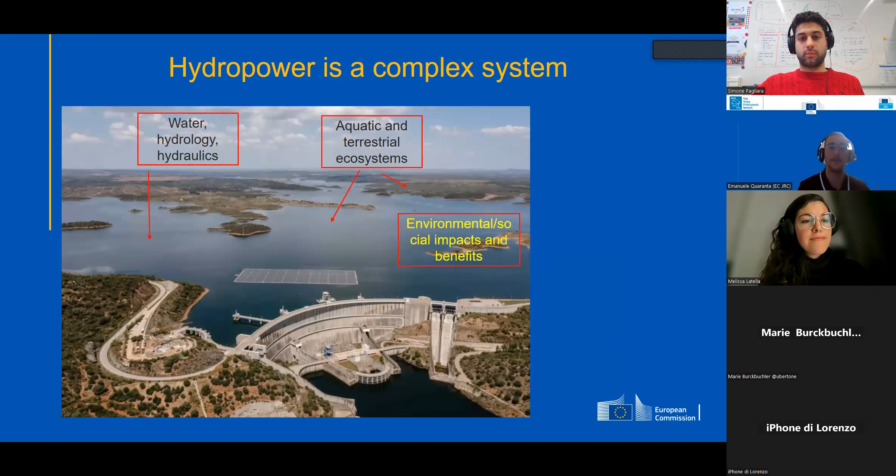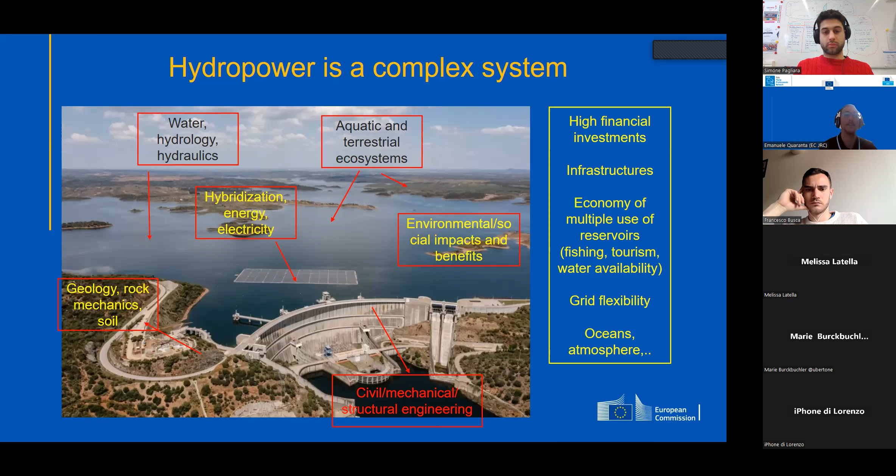Hydropower is a complex system because when we talk about hydropower, we talk about water, hydrology, hydraulics, but also about aquatic and terrestrial ecosystems. We talk about impacts and benefits on the environment and on society, on geology, rock mechanics, but also civil, mechanical, and structural engineering. We also need to consider energy, electricity, and the hybridization of hydropower with other energy sources. But there are a plethora of other sectors involved, for example finance, infrastructure, multiple purpose reservoirs, grid flexibility, or the interference of hydropower with the ocean and atmosphere. So you can understand that when we talk about hydropower, we talk about a lot of different sectors.

Just a bit of terminology that I will use today, since maybe not all of you are familiar with the hydropower sector. Today I will also talk about pumped hydropower storage. Pumped hydropower storage is a power plant composed of two reservoirs. When we need to produce electricity, water flows from the upper reservoir to the lower reservoir, generating electricity. Instead, when we have to consume electricity, maybe because electricity production from wind and solar is too high, we pump water from the lower reservoir to the upper reservoir.

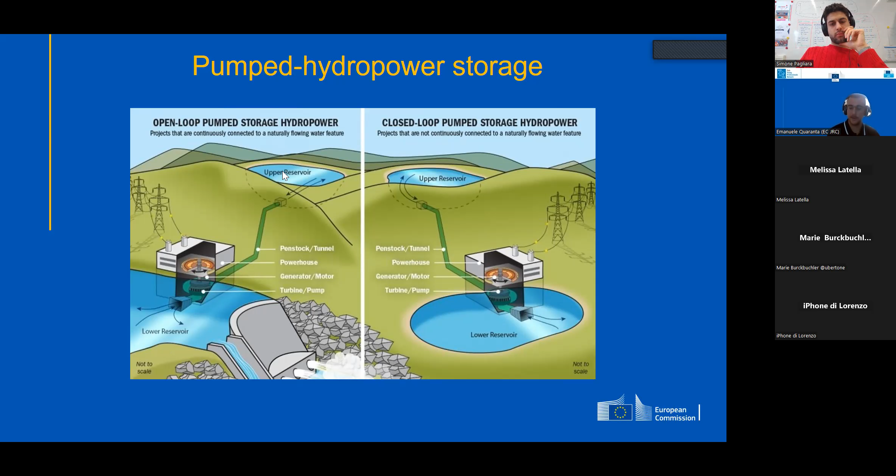Hydropower interacts a lot with the environment and with the hydrosphere, for example impacting on fish and sediments, but it can also generate benefits. For example, it can generate microclimate contexts, which can be very useful for the proliferation of new species and plants.

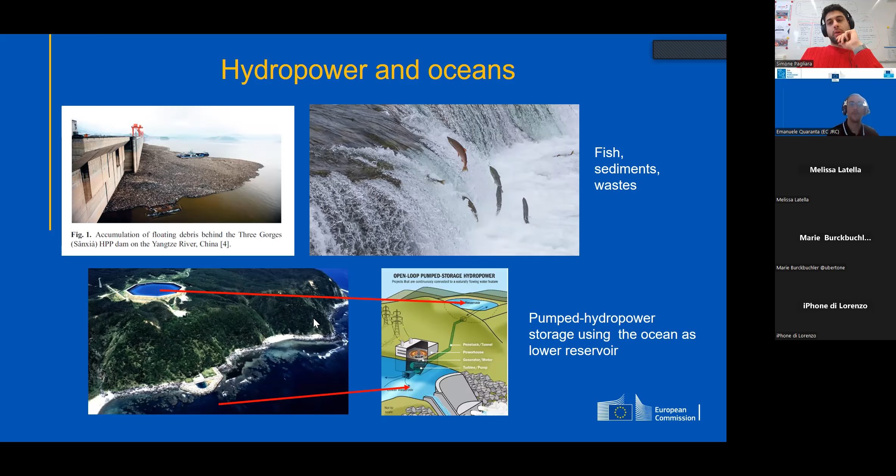Hydropower interacts a lot also with the ocean, because by interfering with fish migration and sediments it can generate problems and impacts. But on the other hand, hydropower also contributes to cleaner rivers, because a lot of plastic that is not attributable to hydropower gets trapped inside reservoirs and can be removed. Pumped hydropower storage can also be used in an ocean context, where the lower reservoir can be the ocean. A lot of hydropower technologies can also be used in the oceans to generate electricity, for example from waves, currents, and tidals. So from these slides, you can understand how hydropower interferes a lot and can also be exploited in the ocean context.

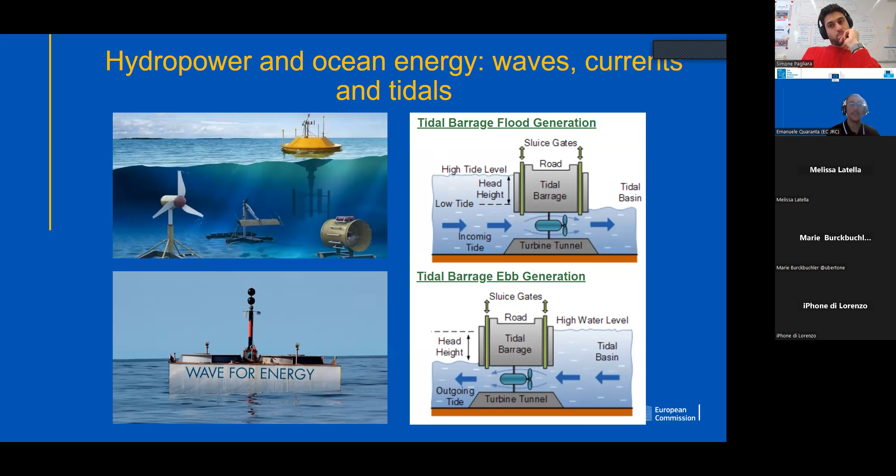Then, in general, water reservoirs, so also including hydropower reservoirs, generate a lot of evaporation, but also greenhouse gas emissions, and this will interfere with the atmosphere. Hydropower obviously interacts also with society, generating benefits, so renewable energy, tourism, but also impacts. For example, large reservoirs in the past have submerged villages in the mountains.

Hydropower can be hybridized with other renewable energy sources, for example, with floating photovoltaics or photovoltaics on the dams, with wind turbines. Hydropower can be integrated with batteries, but also the heat can be extracted from the generator and provide heat for warming, for example, the powerhouse or the buildings.

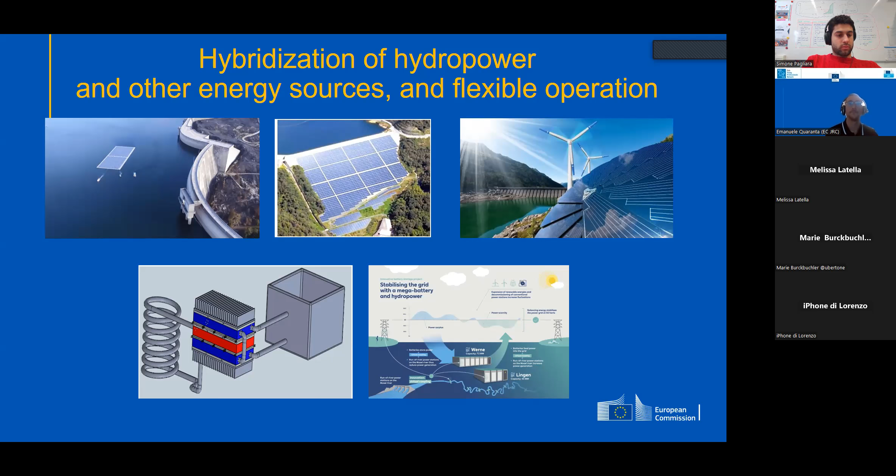So hydropower is at the center of the water energy food ecosystem nexus, together with its impacts, but also benefits. Indeed, on one hand, we have a lot of benefits generated by hydropower, for example, renewable energy generation, energy storage, flexibility, better water management, tourism around reservoirs. But on the other hand, hydropower can also impact ecosystems a lot, especially fish, sediments, and can create river fragmentation.

So from this debate, several questions arise. Is hydropower really sustainable and clean? Are the benefits or the impacts more important? And then, are you sure that the other renewable energy sources are less impacting on the environment? Because now I am perceiving that a lot of people talk about the impacts of hydropower, but overlook and neglect all the impacts associated, for example, with solar photovoltaics and also with the other energy sources.

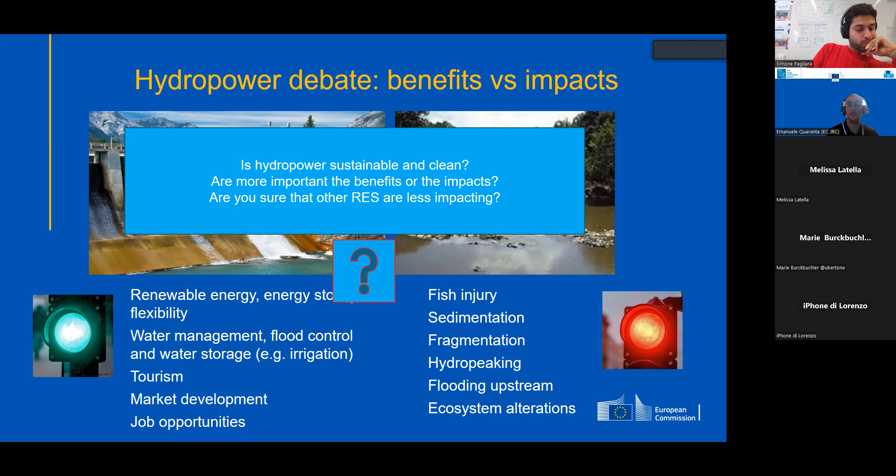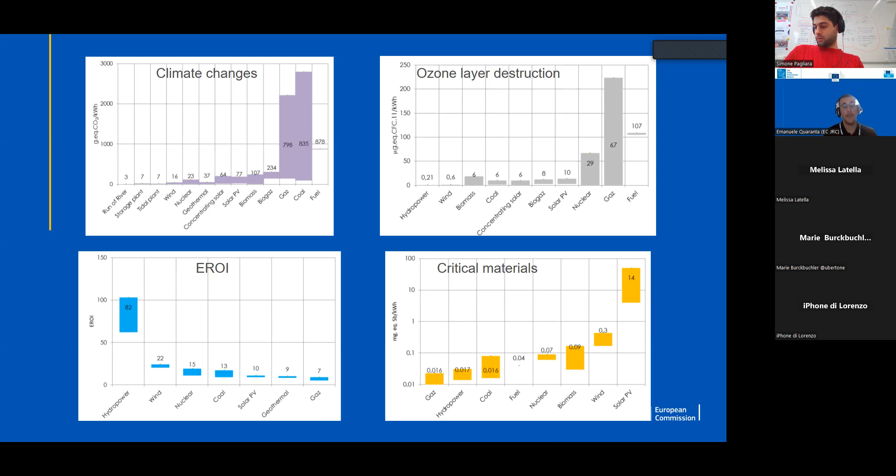So with these slides, I don't want to encourage the use of hydropower and discourage the use of other energy sources, but just to highlight that any energy source has its impacts and its benefits. They should be considered comprehensively.

So, due to this controversy between impacts and benefits, there is a policy debate around hydropower. Because on one hand, we have the impacts, for example, on fish, on the ecological status of rivers, and indeed, hydropower is perceived as a source of impact in the Water Framework Directive. On the other hand, we have the Renewable Energy Directive, where hydropower is perceived as a clean energy technology. Then there are other directives in the European Union, for example, the Flood Directive, where hydropower can generate both benefits thanks to its storage capacity, but also impacts because it interferes with the river flow.

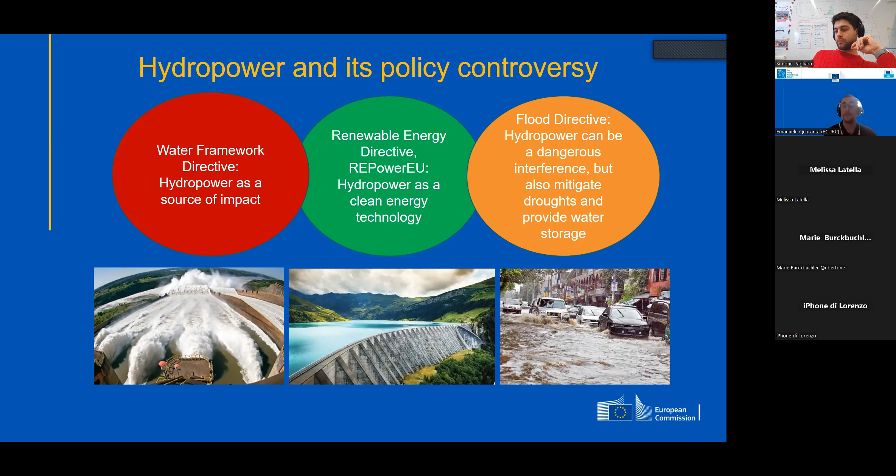And this debate has generated, I would say, controversial binary views, because on one hand, we have people typically more careful about the environment that would like to stop hydropower a priori. On the other hand, we have energy stakeholders, hydropower stakeholders, that would like to build hydropower everywhere. And this is not correct because we have to find the right and optimal compromise.

So some examples of binary views are the following ones. For example, a lot of people claim hydropower barriers are mainly responsible for river fragmentation. I would say, yes, hydropower contributes to river fragmentation, but only 5% of barriers in European rivers are for hydropower. So the problem is not strictly associated with hydropower. Yes, hydropower contributes, but to a lesser extent.

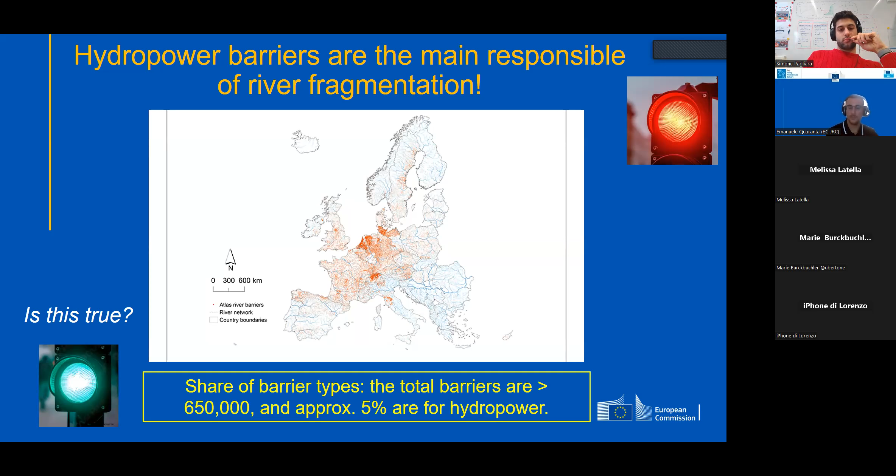Another example, on the other hand, is this. A lot of people say hydropower does not consume fuel, so it is clean. I will say, yes, I agree, but we have to consider that some reservoirs, especially in tropical climates, emit carbon and methane from the decomposition of organic matter, so they can contribute to greenhouse gas emissions.

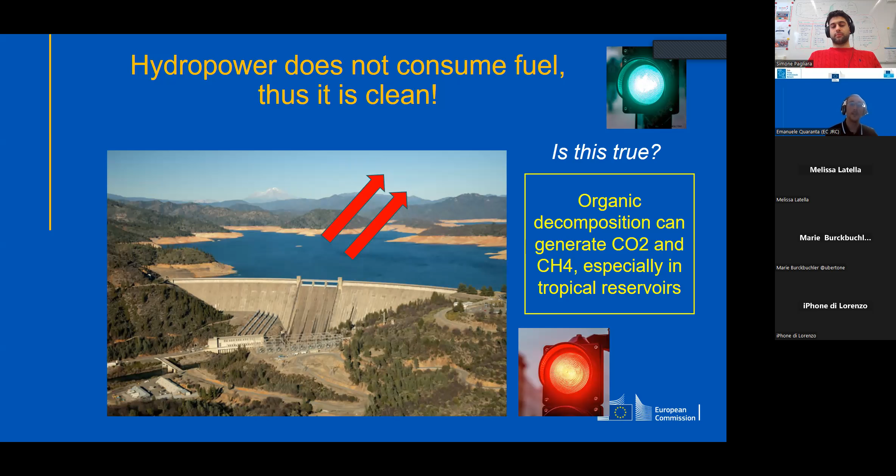So you can understand that often these binary views are of limited perspective, and so we need to overcome their limitation by building sustainable hydropower. And sustainable hydropower is the achievement of a compromise, of a balance between electricity generation, benefit on society, and impacts on the ecosystem. So we have to incentivize and develop mitigation solutions and innovative technologies to reach this compromise.

So some examples of sustainable hydropower where the compromise between impacts and benefit can be achieved are listed in these slides, where I did a lot of assessment at the European scale to assess the sustainable hydropower potential option. For example, one option could be the modernization of the existing hydropower plants, not only to increase energy generation, but also to mitigate impacts and to increase resilience to climate changes and to increase flexibility.

Then we can tap hydropower in water mills or in existing barriers that cannot be removed. We can develop hydrokinetic turbines in rivers, although the potential of hydrokinetic turbines is limited. We can develop hydropower in existing water distribution network and wastewater treatment plants. We can recover heat from the generator or also install floating photovoltaics on hydropower reservoirs.

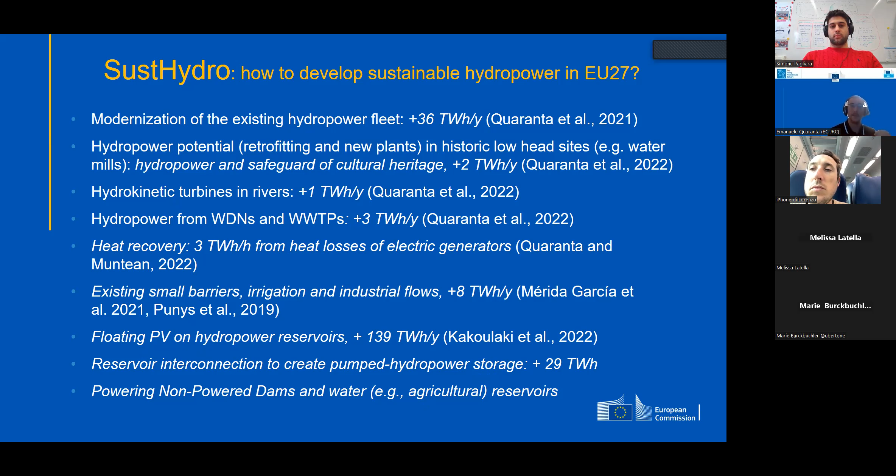It is possible also to interconnect existing reservoirs to create pumped hydropower storage. Furthermore, we can power and install new hydropower plants in existing dams. So there is a lot of potential of developing sustainable hydropower without harming the environment. So here you can see some key references with some assessment at the European scale of the potential of sustainable hydropower.

And some conclusions: hydropower is a complex sector. It needs more interaction and different kinds of expertise. So please do not hold an a priori position, do not hold a binary view, so yes or no, but try always to objectively and critically compare hydropower with the other options.

Then we have also to say that the European Union is hydropower leader in scientific terms, but also from the industrial and innovation point of view. And the hydropower debate, especially in the policy context, has been the main driver of the knowledge and expertise development of the hydropower sector.